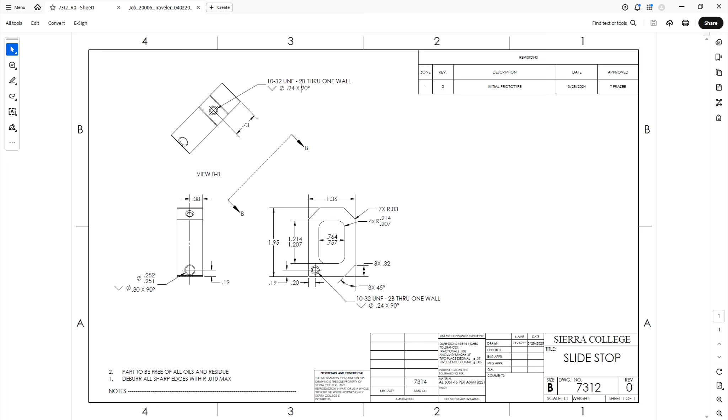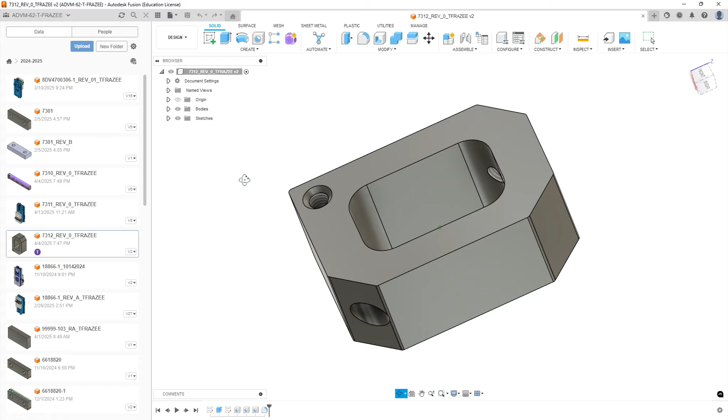You're going to open up Fusion, and you're going to open up your data panel. Open up your data panel, you're going to open up your part. Okay, it should look something like that. And we're gonna plan on our stock first. So our first operation either needs to be like this or like this in the vise.

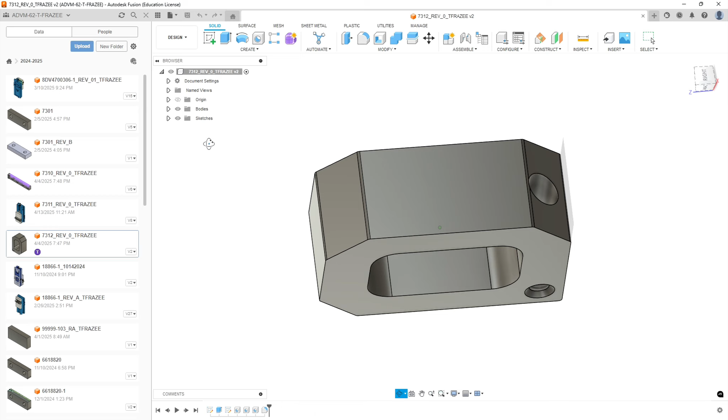So the semantics is, which side do we cut first? I'd suggest we cut this side first. That way we can cut most of the features within itself, so they'll be accurate to each other. And then when we flip it over for the second side, we're really just decking material off and maybe doing deburring passes around the edges.

Then our third op will be stood up like this against the vise stop. We're going to drill and ream this hole, which hopefully the reamer will take off the burrs of our threaded feature. And then the last setup, we would put it up on end and have it facing like this, and it'll allow us to use this face here as an indication spot for our origin. Okay, let's go to it.

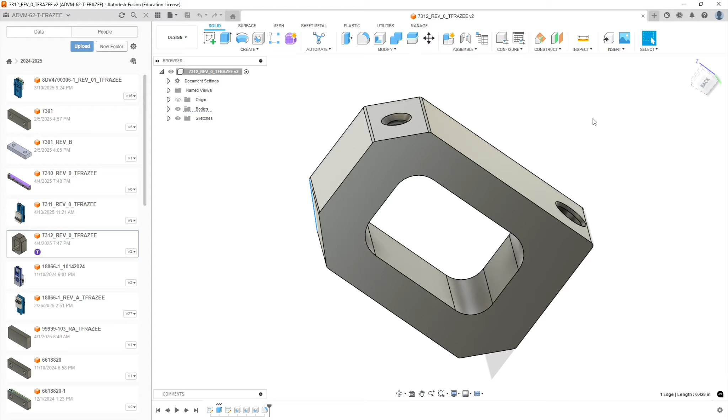We're going to set up our stock, and then we're going to set up our vise assemblies. That way we can have all the operations planned out, have the proper vise setups and stuff when we get into the machining. Okay, so first our stock. We're going to look at this in the plan view, so let's look at it in front with it horizontal, the square corner, 90-degree corner on the left-hand side, and we're going to create a sketch on that front plane.

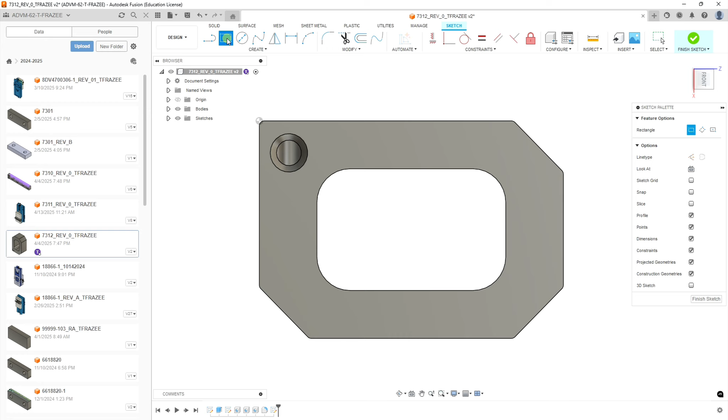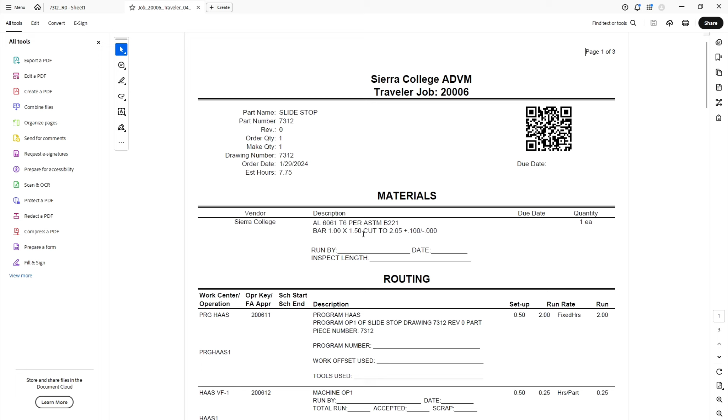Oh, excellent. It rotated it for me. Alright, rotate that back. And we're just going to draw a box around this. And before I go any farther, I'm going to minimize my data panel there. Don't really need to see all that stuff. Okay, so if we go review to go back to our sheet, we have 1 inch by 1.5, so the thickness is going to be 1 inch. So 1.5 by 2 inches and 50 thousandths.

So let's do the width first. So this is 2 inches and 50 thousandths. Okay, we're planning on that. And in the other direction, it's 1.5. Okay, so that's our stock size. And we're going to center it again.

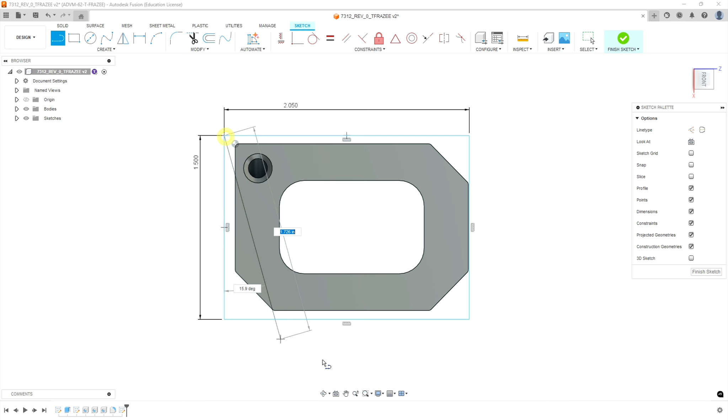So, a bunch of ways to do this. As I usually do, I'm going to draw corner to corner on the box. I'm going to right click on that entity, turn it into a construction line, and then we need to find the center of this shape. And we draw another line. Let's just draw a line horizontal.

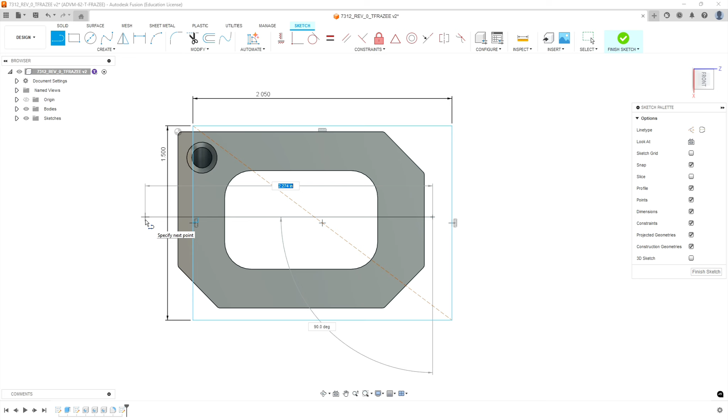Okay, I'll right click on that, left click, and then right click on that. Great. Turn that into a construction line. I'm going to pick on our endpoint and select midpoint of the beveled side. So that should be centered with our part. And then on this end, we can just bring it back, highlight it, highlight the edge, and make it coincident.

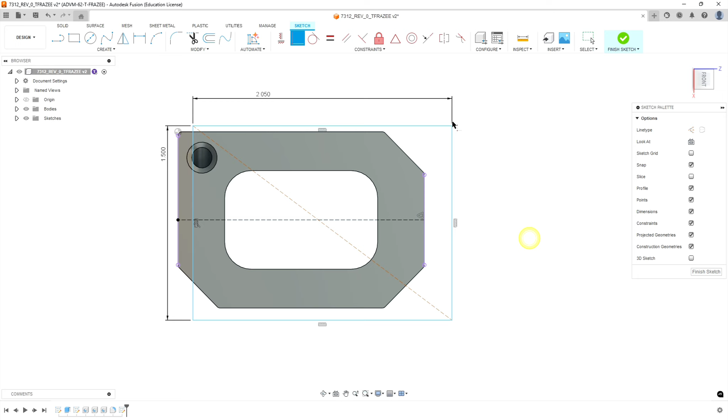So the width of this line is centered, and it's centered on this right hand side because this is all equal length. That should be center of the part itself. Now we're going to do a relationship or a constraint of center to center on our lines, and it should equally space our stock around our part.

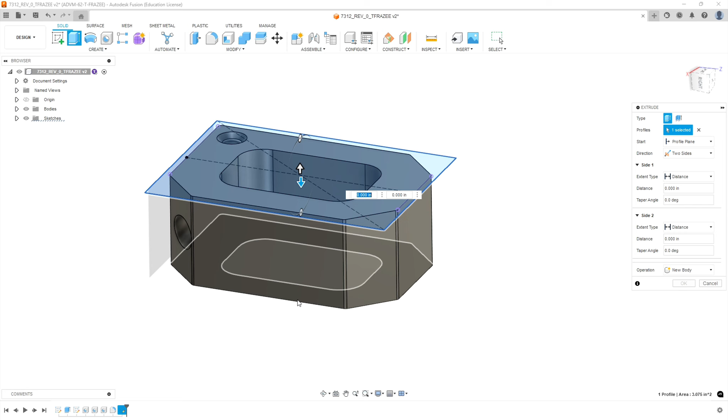Okay, we're going to hit finish sketch, and as we've done before, we're going to do an extrusion. We're going to do it in 2 sides. The side I have highlighted with the blue arrow is going to be the majority of the material. So it's going to be 1 inch minus whatever we're going to skim off the top of this.

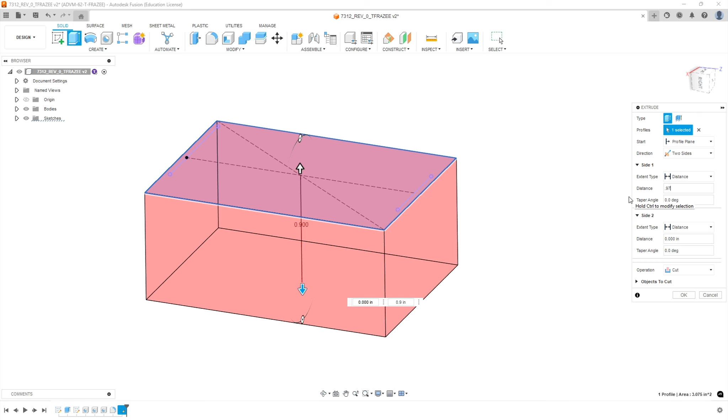So on side 1, let's do 970 thousandths, and then in the opposite direction we'll go 30 thousandths. That should add up to an inch. And instead of a cut, we're going to do a new body, and that should be okay.

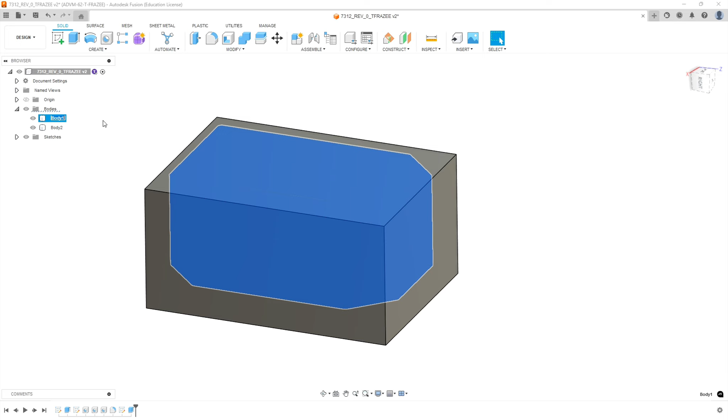And now we're going to expand our bodies here, and if we highlight the actual part, we want to change the name of that to the part number 7312, and the other one we're going to call it stock. Okay, we're going to right click on the stock, and we're going to go down to opacity control and set the opacity to 50% so we can see our part within the stock.

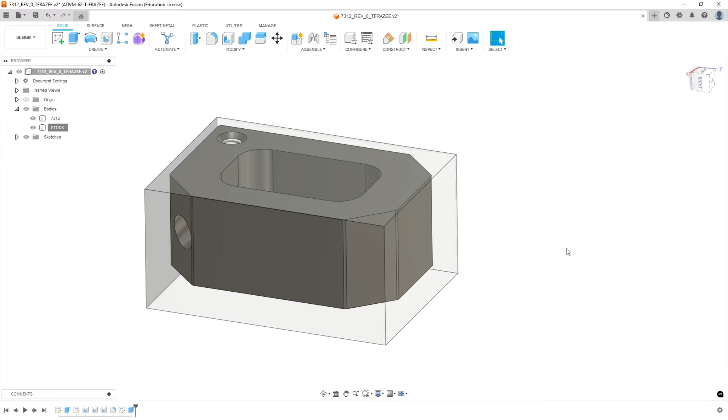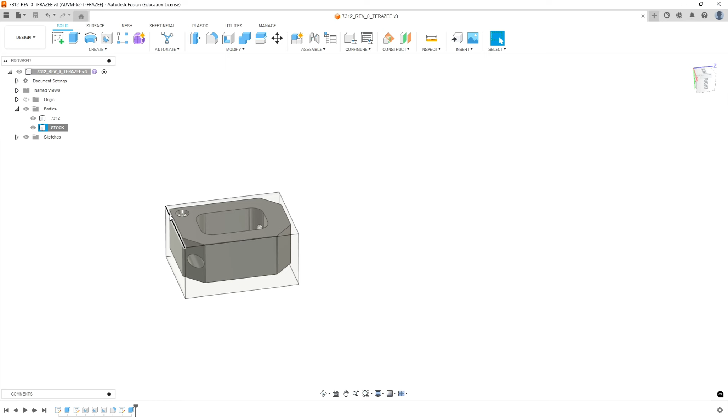Okay, so we have our stock volume. We're going to take 30 thousandths off the top as our first operation. So we probably should just orientate it like we see it in this screen. We're going to orientate it this way. That way all our dimensions that define all these features in this face come from this corner over here. So we want to maintain that.

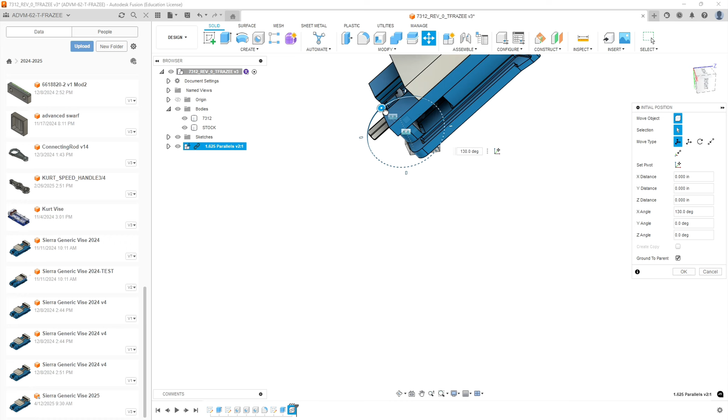All right, so let's bring in, we're going to open up our data panel. We're going to bring in an instance of our vise. So we got the Sierra College generic vise. Bring that sucker in, and we're going to use the 1 inch and 5/8 parallels. And we're going to orientate our vise like so.

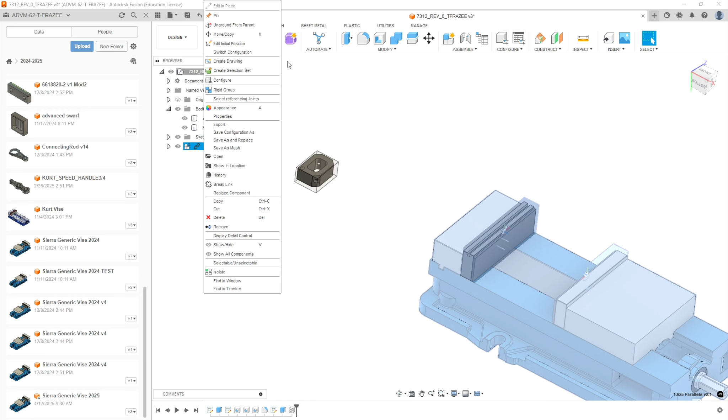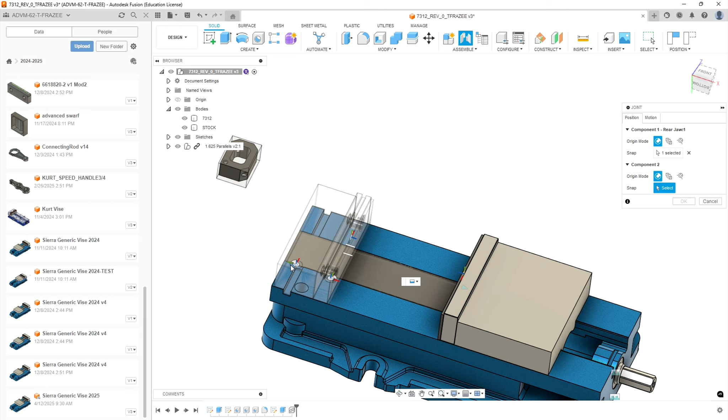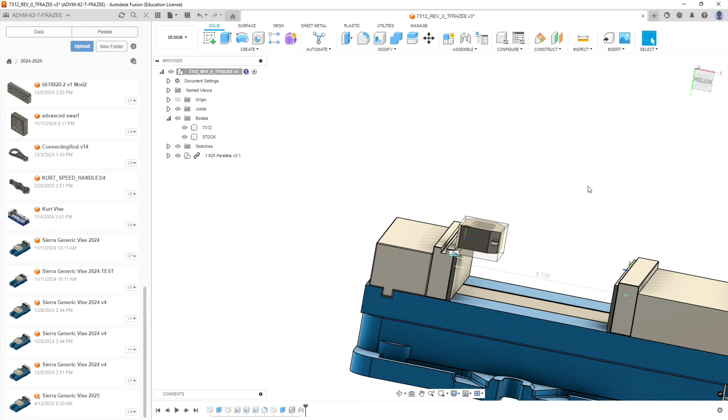We need to right click on this and unground it from parent so that it can still move around. Okay, and then we're going to do a joint. There we go. Hit OK. So there's our part in its stock, and then we're going to modify this number so that this part of the stock sticks to the work piece, which is our stock size. So that should be 1.5 inches.

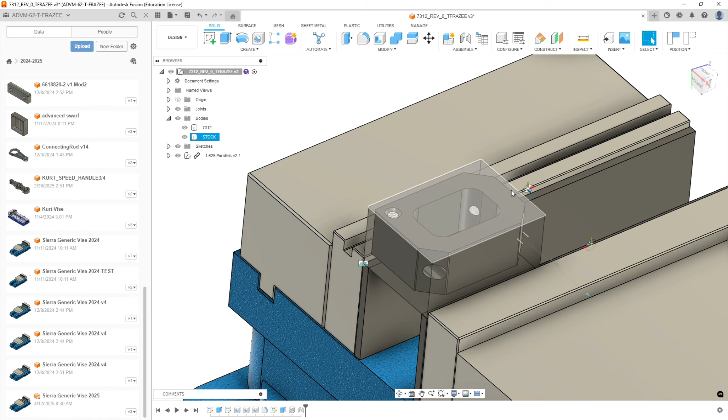Okay, that's our first operation. Second operation, we're going to be flipping this part. We'll want to set up a vise stop on the left side that touches perhaps center to the right of here. That way when we flip the part about the y-axis, it'll register on the machined edge of this edge I have highlighted over here against the parallel. So here we go.

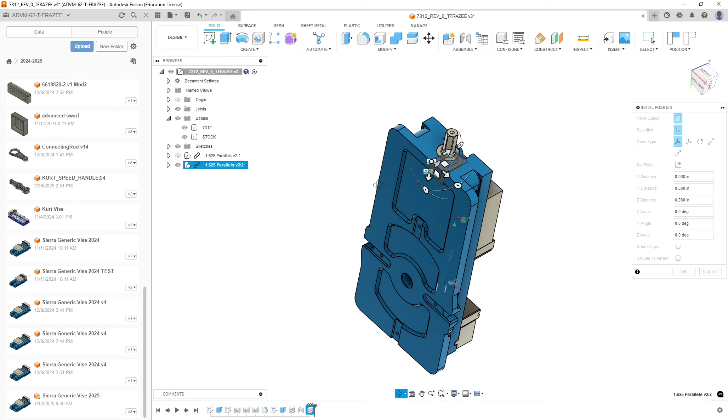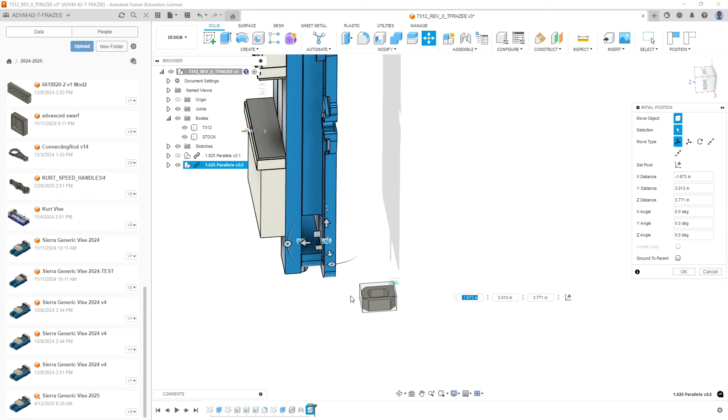We're going to hide this instance of the vise. We're going to bring in another instance of the vise. We're going to use the same height parallels for this operation. Okay, we want to position the vise in orientation to the part. So if I have my part and I want to hold it like this, I would need to rotate the vise 90 degrees this way, and 90 degrees this way, and then 180 in the last direction.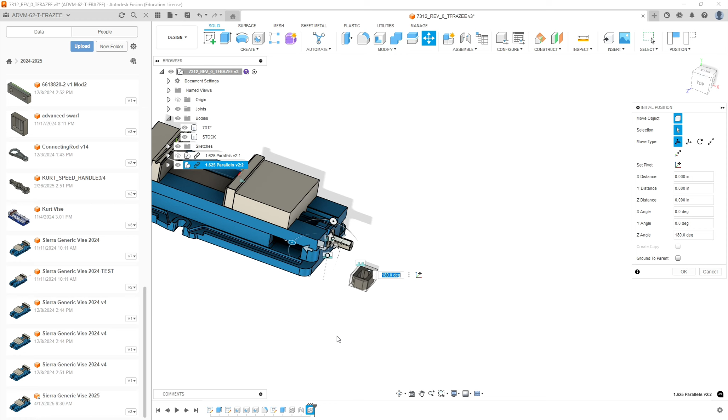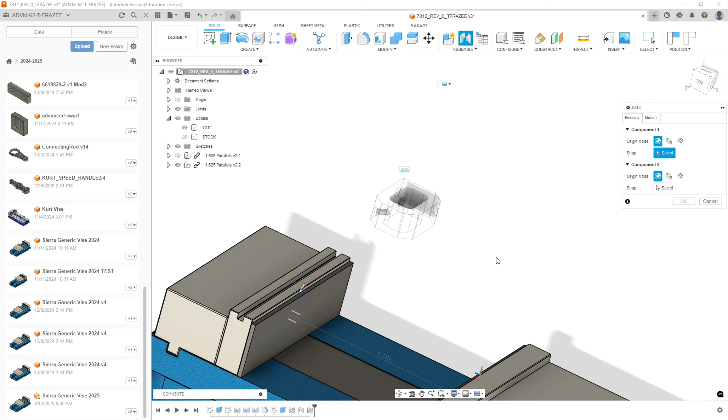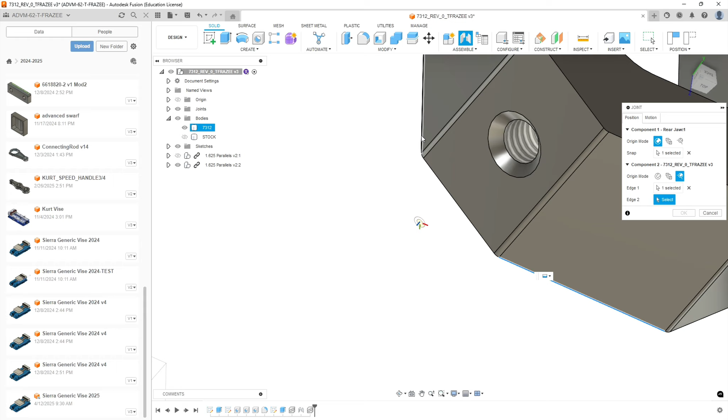And we'll hit OK. Now for this alignment, we're not going to use the stock, we're going to reference the machined edges. So our joint on the first pick will be just like we did last time: top edge of the corner of the parallel. But our second selection, we're going to do through intersection of edges. So we'll pick the one edge, the other edge, and they should come together where that theoretical intersection would be. It really will have a stop contacting the left side of the part.

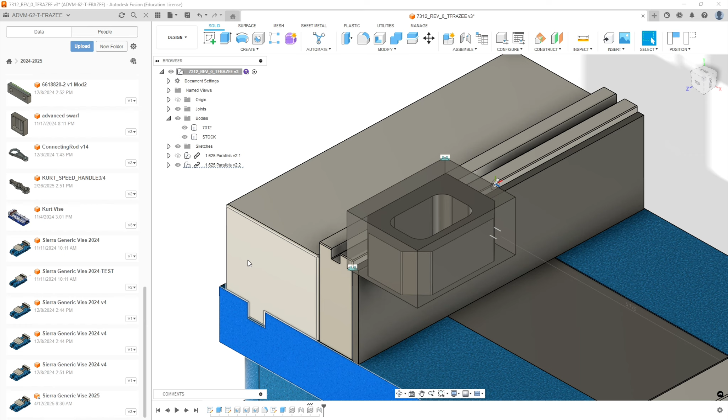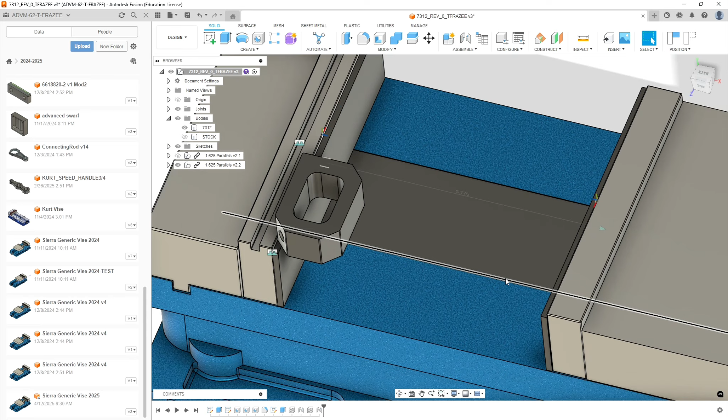Is that okay? Alright, so operation 2 is going to deck down the remaining hat on top. We'll probably do some chamfer cutting around the edges to remove burrs. Then our next operation, we need to close the vise up. So if I hide the stock, my finished part measures 1.38. I'm sorry, 1.36. So we're going to change this value to 1.36. And that closes up the vise.

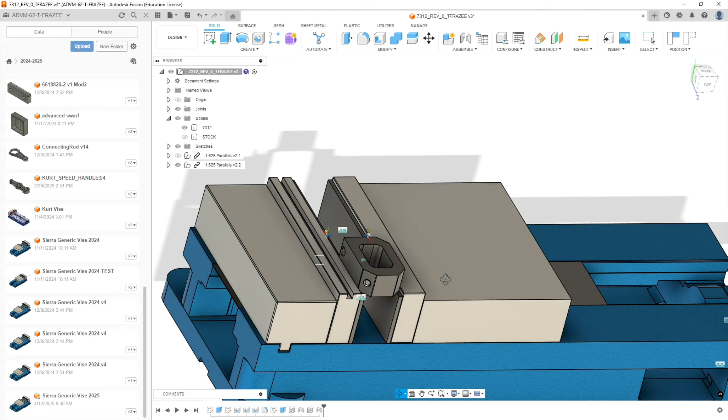Okay, so next operation, we want to do this hole here. You don't really want to drill onto an angle like this, so we need to drill it from the side that's flat, where it's best. So we hide this current vise setup.

We want to drill and ream the part from the orientation I have shown here, with this face normal to the spindle. So let's bring in another copy of the vise. On this, we're going to need different height parallels. We don't want to just grip onto the very bottom of this. That won't give us a very square result. We want to grab onto about half the part, perhaps.

Or more. This part itself is almost 2 inches high width. No, I'm sorry, it's 1.5 inches width. So let's go with some shorter parallels and see if we can use those for the last two operations. So let's go with the 5/8 parallels version. If we have to, we can change that.

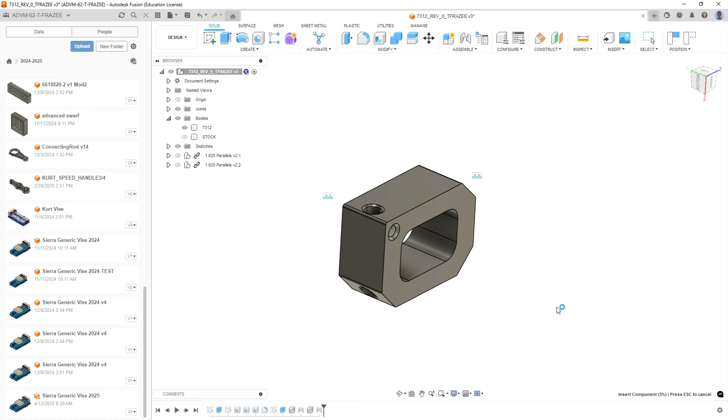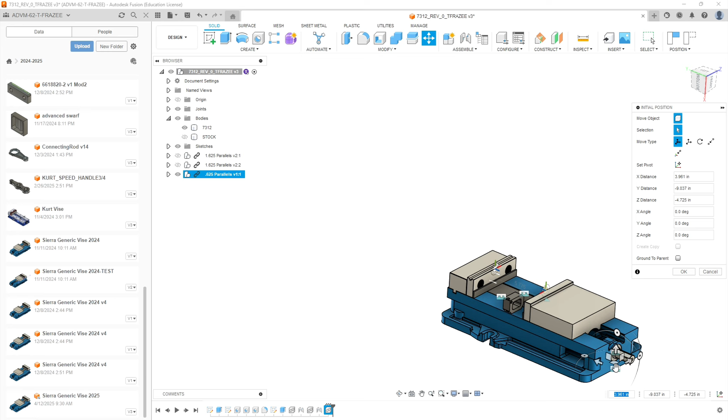You do want to use parallels. You rarely want to use just the bottom of the vise. And the reason being is you won't know, without tapping it and moving the parallels, whether you truly have the part flat against the surface. So you do still want to use parallels, even though it's held in there pretty deep. Okay, so I might have chosen parallels that are a little too short. We'll see. Okay, so we'll accept that location for now.

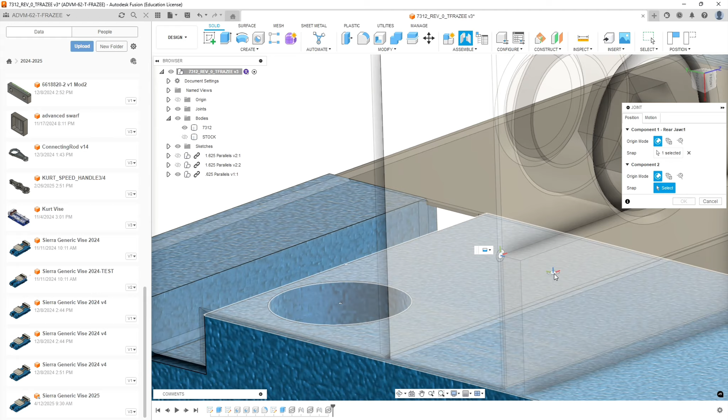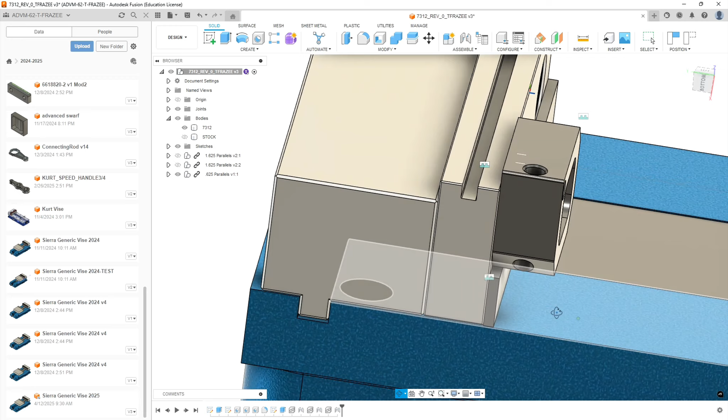We're going to do a joint, and we're going to pick this corner, but we want the disc parallel with the vise jaw. And that way, when we go to do the origin off this piece, and we pick intersection, it orients it the same way. And let's hit OK to accept that. I think that'll work. The part sits just above the surface, which is fine.

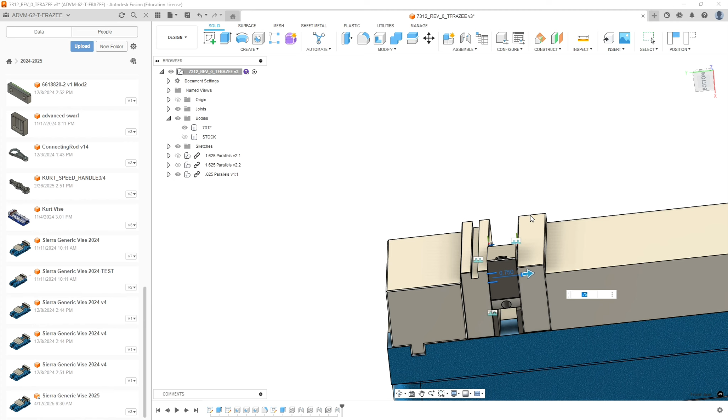And we're going to drill through. We do want to make sure our parallels aren't underneath where we're drilling. Don't want to hit that. Okay, then we'll change this distance to 0.75, which I believe is the thickness of our part. And so that operation should be clamped, something like that. You are going to want to make sure this is all deburred pretty well here.

And again, when you set it up in reality, you don't have to have this flush with the edge. What you do need is your stop touching that, and that's where your origin is going to stay. If you set that up wisely, your X and Y location won't change. You'd be just changing your Z height shift to compensate for the different size parallels.

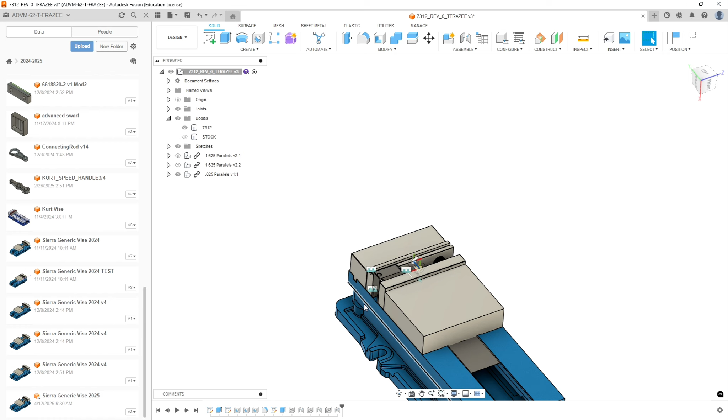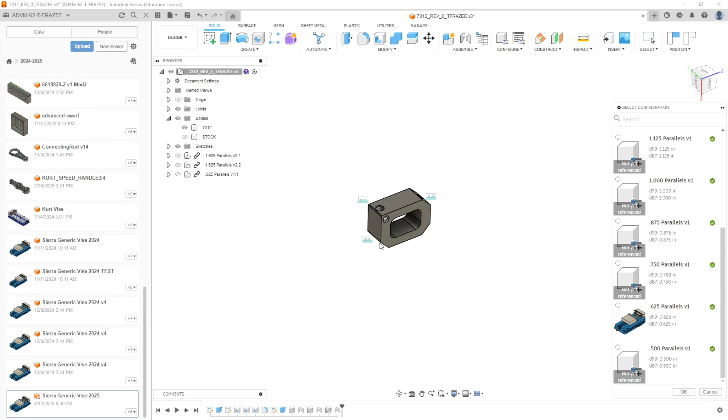Okay, we got one more operation to set up, and so we're going to hide this instance of the vise, and we're going to bring in our last operation. And we're going to use the same size parallels, so we're going to use the 5/8. I like using the 5/8 as opposed to the 1/2 inch, because it gives you enough room to get your calipers under there and measure the part while it's still in the machine.

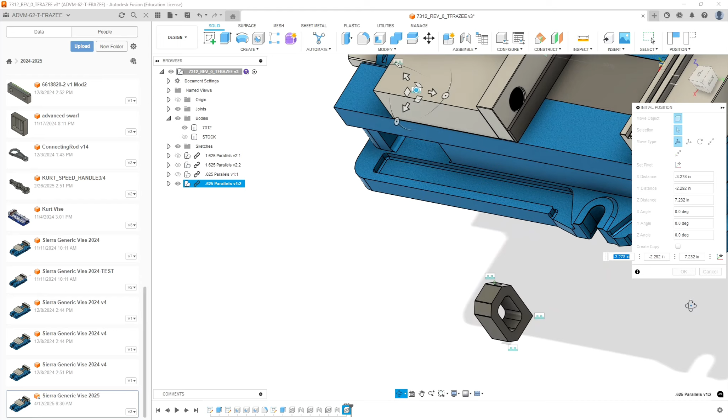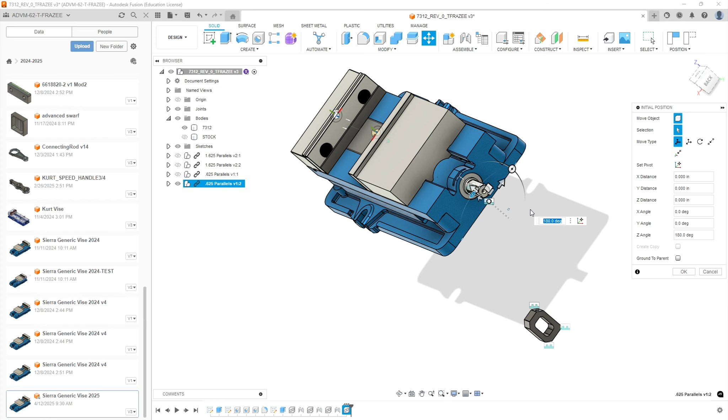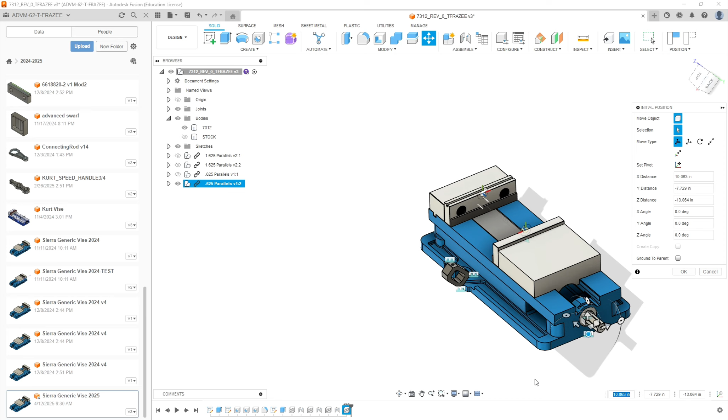Okay, so our next operation, we actually are going to have our part in the vise like this. So, one, I need to flip the vise around 180 degrees. In that direction. Then we're going to rotate it 45, because that's the angle of our chamfer. And then we should be able to move it around in space. Get it somewhat close.

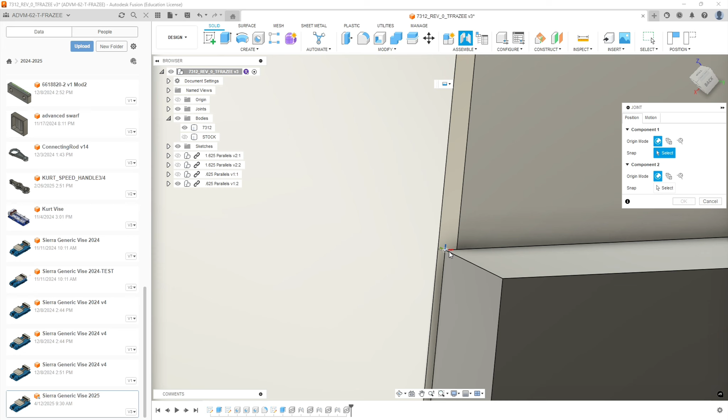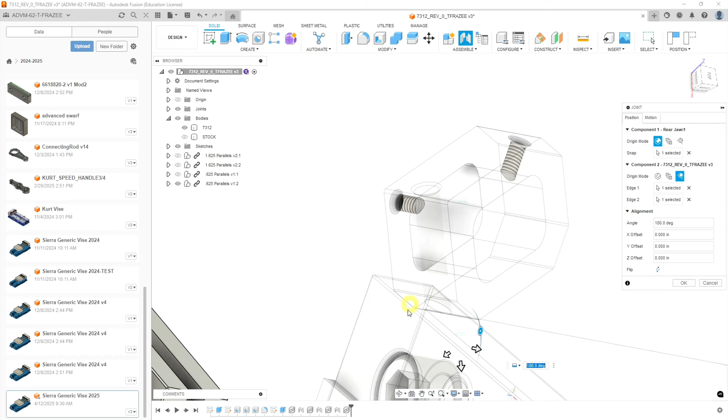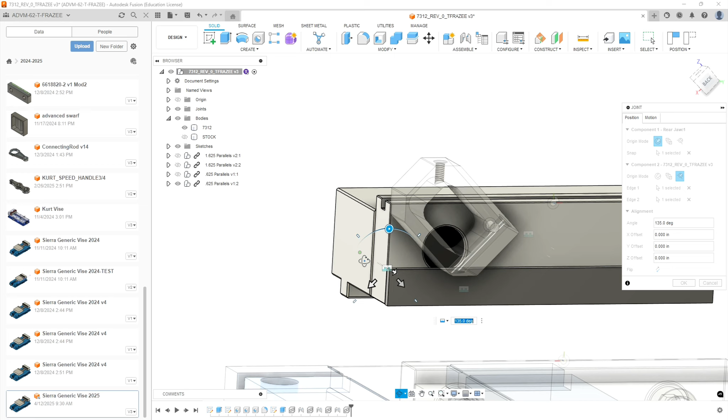Okay, so let's take a look at this. We're going to do a joint with the top of our parallel. We want this parallel to the vise jaw. And then on our part, we're going to do the intersection of two edges, which will be this edge, which is now vertical, and this edge, which is horizontal. Okay, I'm going to rotate that to 135 degrees and hit OK.

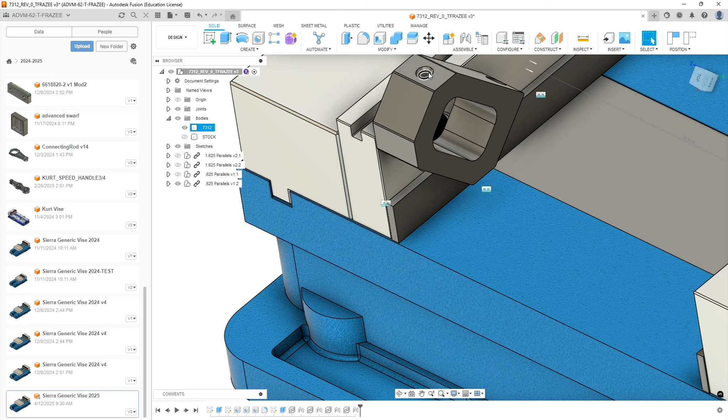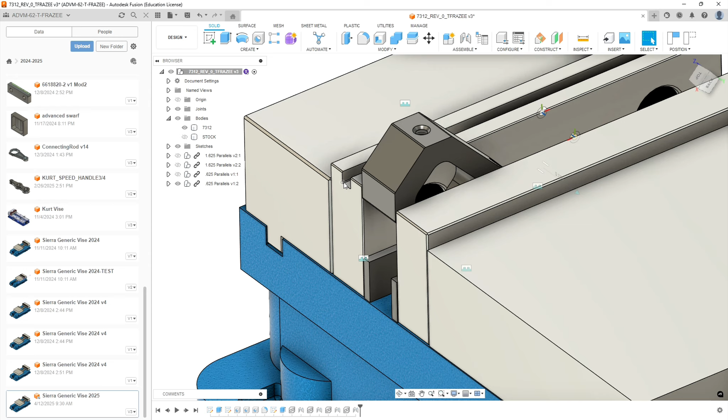Alright, so we have our part aligned on the parallel in such a manner that our edge here is vertical. That's a 90 degree relationship, which gives us this threaded hole normal to the spindle. And I'll change this to .75, 3/4 inch width. Okay, so that's our last operation. Okay, so we got our operations in order, each setup with the vise in the proper orientation.